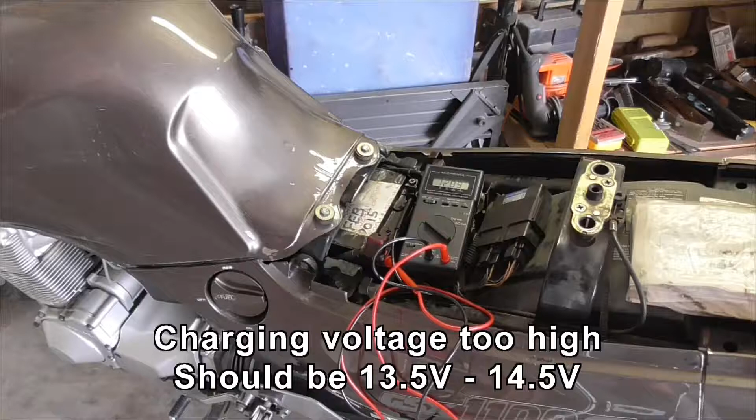So while I was out checking a few things the other day, mostly on this piece to get the connectors nice and tight so it'll actually start, I did notice that the battery voltage when charging was kind of high.

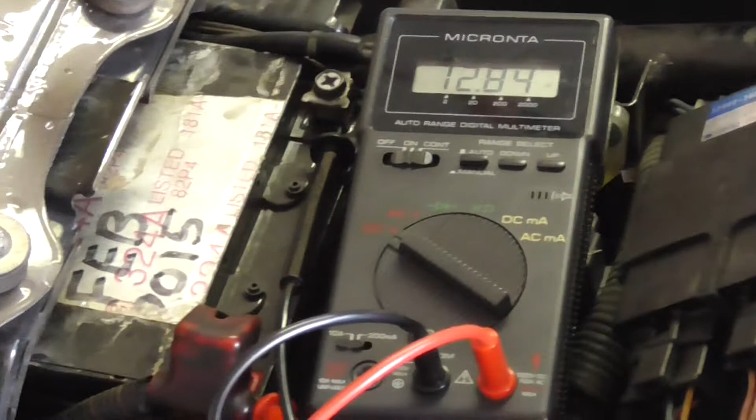Right now, and I'm really surprised, this is 12.84 after it's been resting a day or so. Pretty good voltage, but the charge voltage is kind of high. Let me start it up and we'll see what it does.

You can tell it's about 90 degrees here.

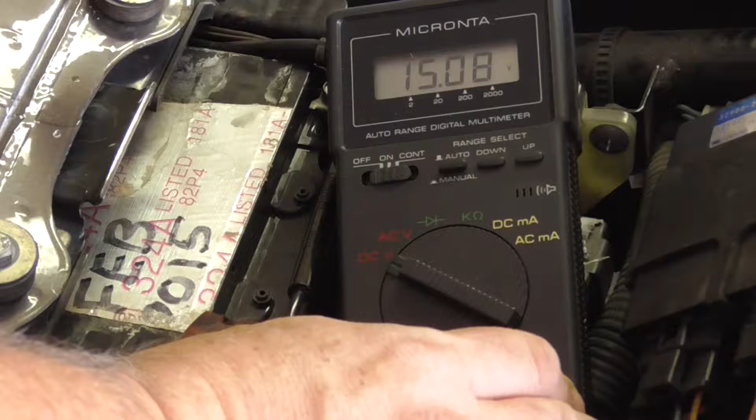As you can see, it gets into the 15 volt range. That's actually higher than what's in the book. So that's a little bit of a problem. We're overcharging the battery, and eventually it's going to hurt it, kill it.

I don't know how long it's been like that. I only checked it because the Triumph Bonneville I have had a regulator that failed low. It wasn't charging it at all. It looked like it was at idle, but as soon as you revved it, the voltage went away. It just wouldn't charge. So this one is actually doing the opposite, it's overcharging.

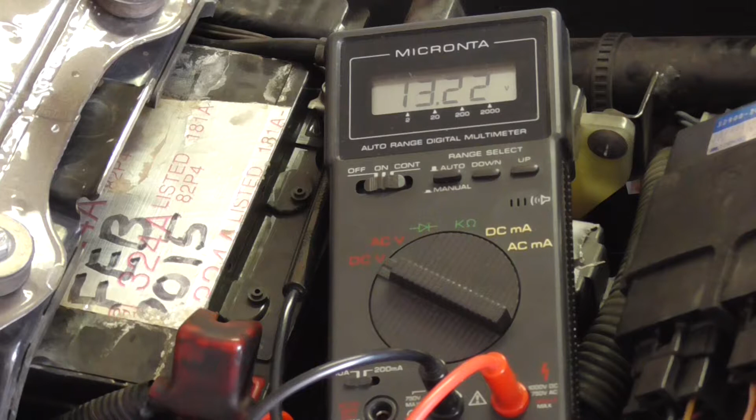So I do have a spare engine. We'll see if I can swap the alternators out on it and see if we can't fix this issue.

Okay, so this is the good book on all things G. This is the alternator. The offending item is this little bit here inside the alternator under that black cover. That's the regulator. Over here it states that the minimum is 13.5 volts at 5,000 RPM. That's why I revved it so much before.

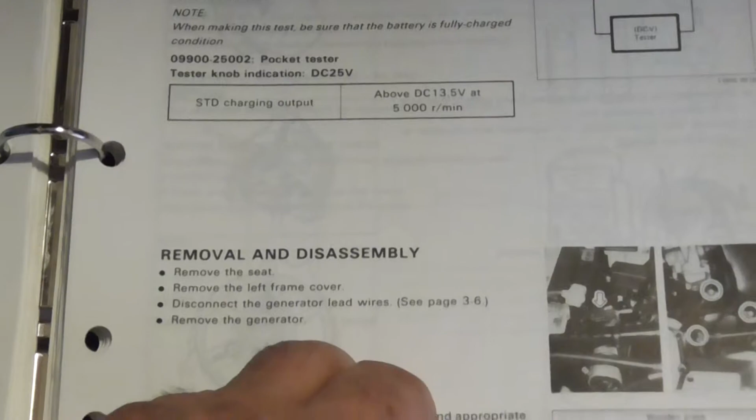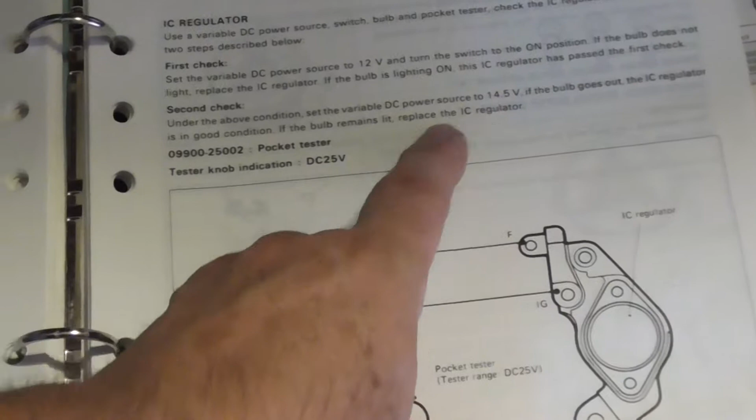Then we switch over to another page, and here where it says second check, blah blah blah, 14.5 volts maximum. Replace it, the IC regulator, which is this piece.

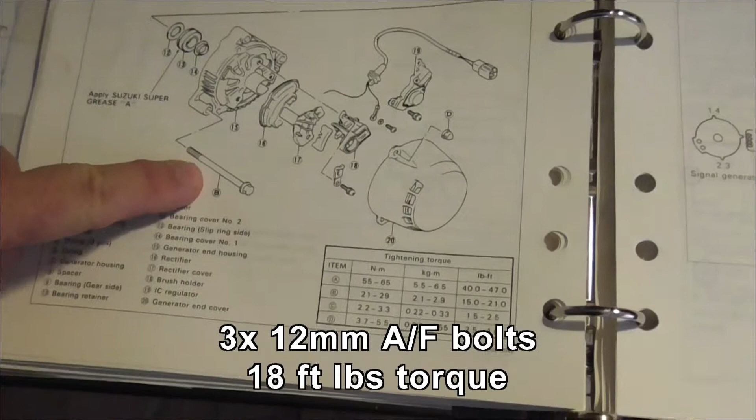So this is their little test setup. And here's the page with the exploded diagram. Yeah, there's the offending item right there. I think there's 3 of these bolts to take off. Replacement torque's 18 foot-pounds.

Looks like I guessed right with the 12mm. The other one's well hidden. That's going to be well hidden on the bike. The other one's up here.

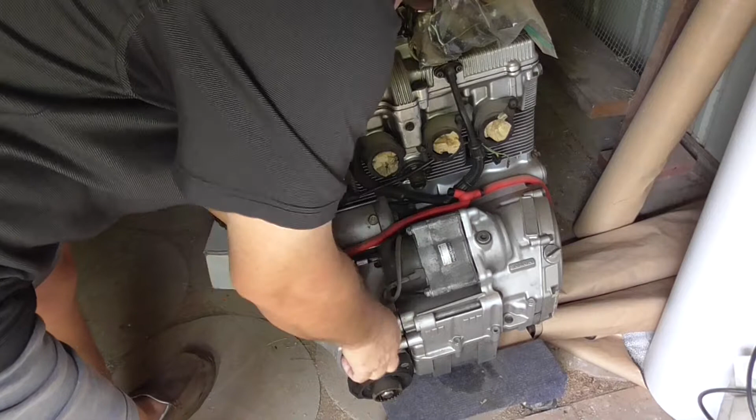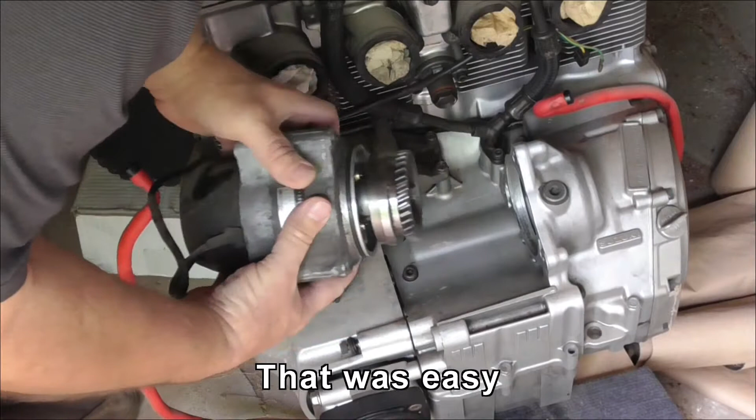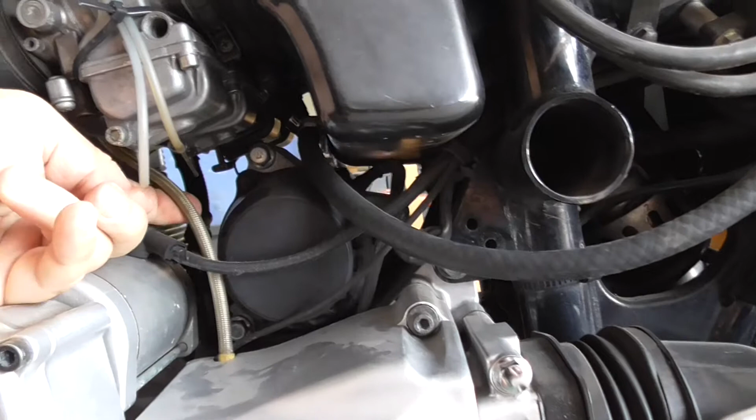Of course, the on-bike access to those 3 bolts I just took out, yeah, a little trickier. Still, I think I can get to them. Looks like this one I'll just push my clutch line out of the way. Have to take the starter off, and then hopefully I can clear all my fuel level crap.

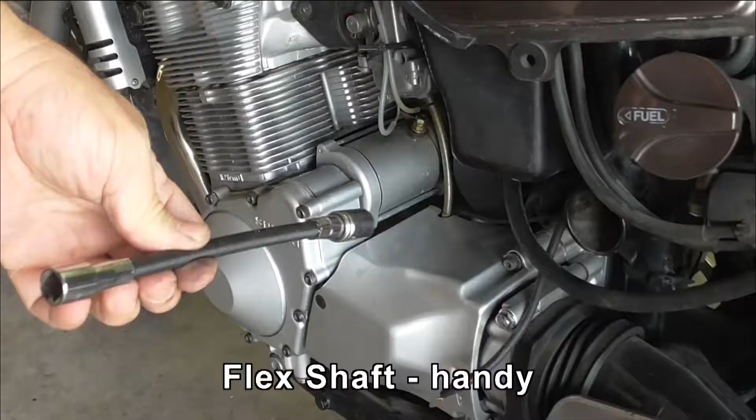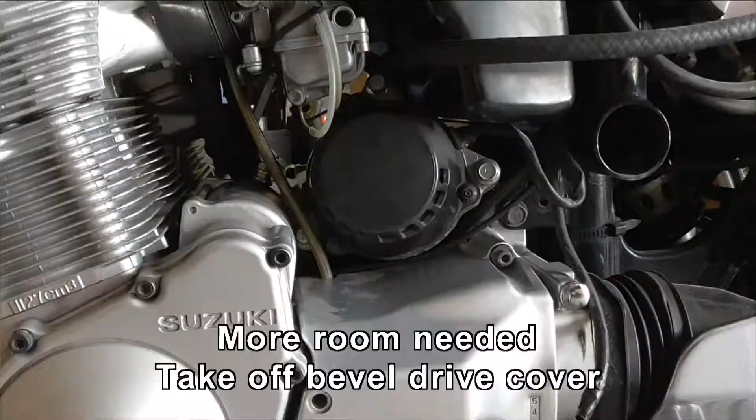Okay, here's a handy little tool I picked up. It bends a little bit, so I can get this 12mm in way down here. And yeah, now I can undo it. Yay! I'm having a bit of difficulty getting it out because of the clutch line.

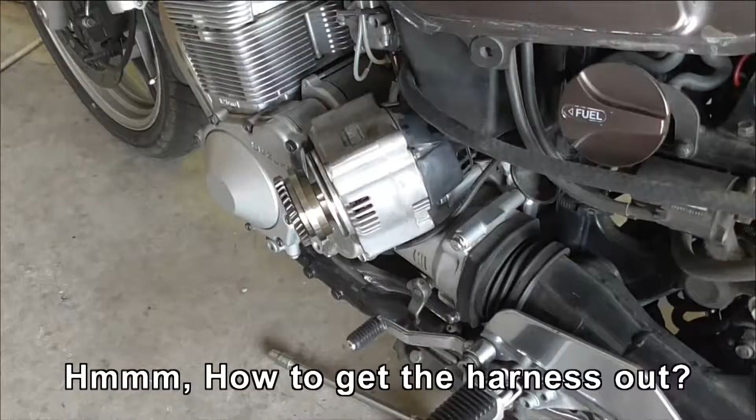It's really not wobbling around much, so I am going to have to take this cover off to give me a bit of room. Alright, I've got it half out, but I've obviously got to get the lead out as well. The lead comes back all the way to here, which is the charging one, and I hope I can unthread it without having to take the tank off.

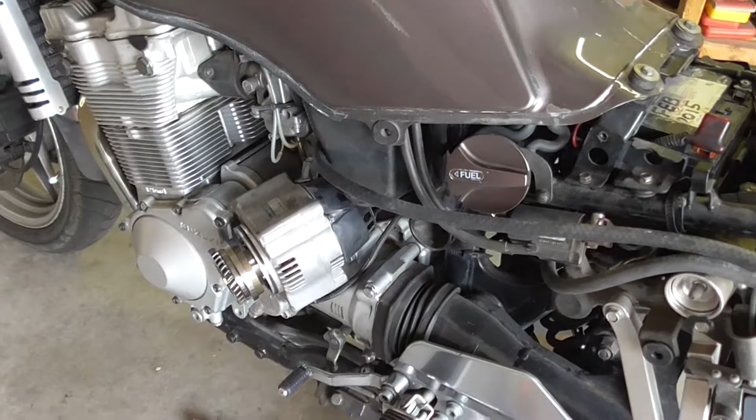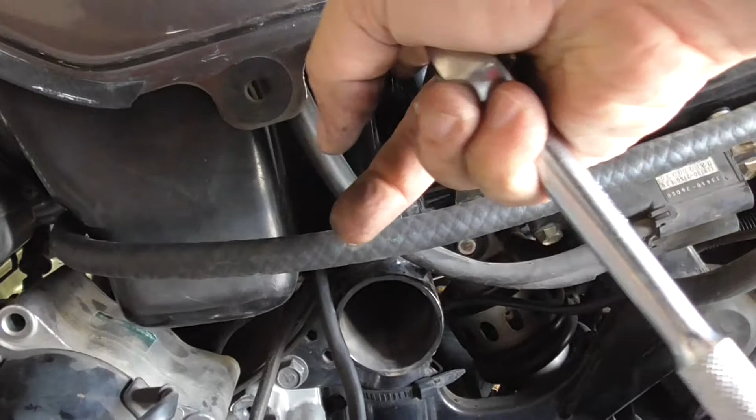Otherwise that'll just be more stuff to take off, put back on. Okay, well I can't get the connector out, it goes around this vertical frame post here, and it's getting jammed between the filter box and that post, so I am going to have to take the tank off. What fun.

Alright, so with the tank off, all becomes clear, right? Yeah, well here's the connector, and it wouldn't go past this point, but if you lift it to here, then you can pull down and out. That was easy, wasn't it? But you got to take the tank off to get there.

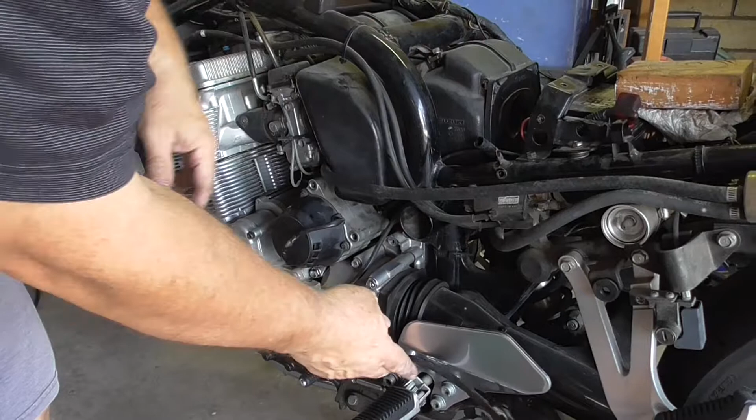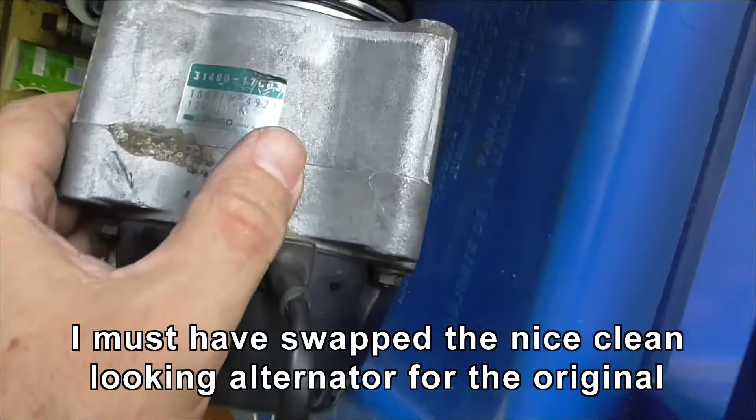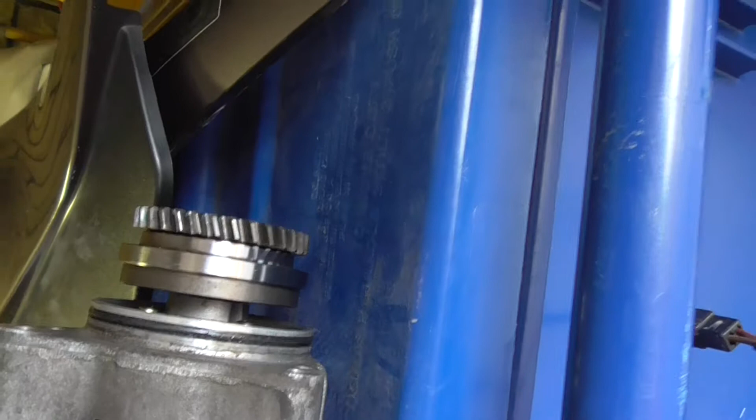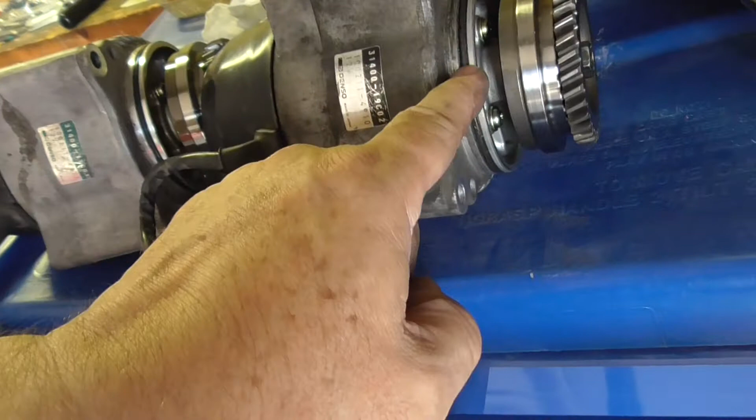I hope it works. I'm going to clean up the ends. I know this is a new O-ring, so I'm going to put this one over here on there, and put this one back on that one for the time being.

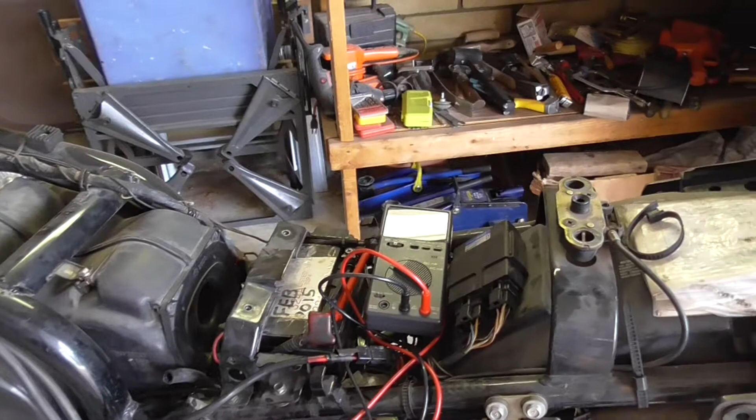Alright, so before I button everything back up, I ran the lead up to its connection point, got the voltage on the battery. I want to run the engine and see what the voltage is going to be. Make sure it's not too high, because it's kind of pointless, you know, putting that in, going through all that trouble if it's not going to work. So let's fire it up and see what it does.

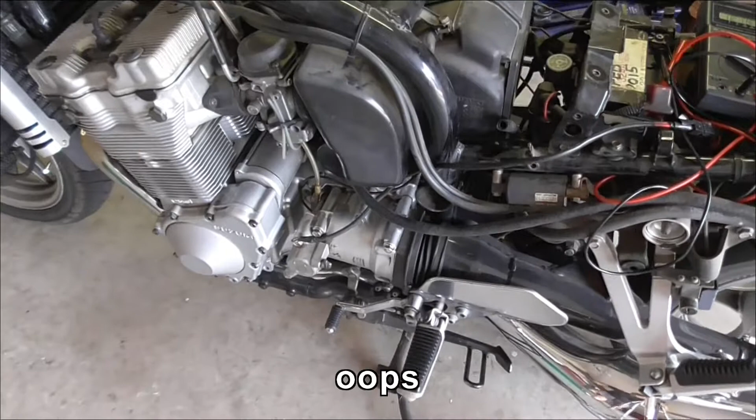Yeah, it would have helped if I'd have reconnected the start motor instead of having it just ground out on the frame. Okay, so we're running again. This is about 1000 RPM.

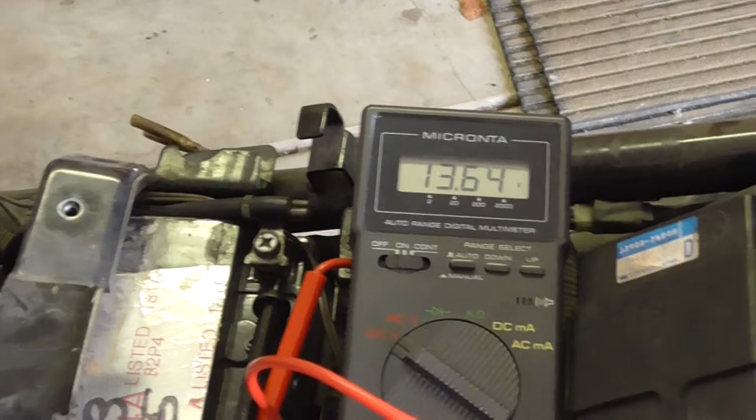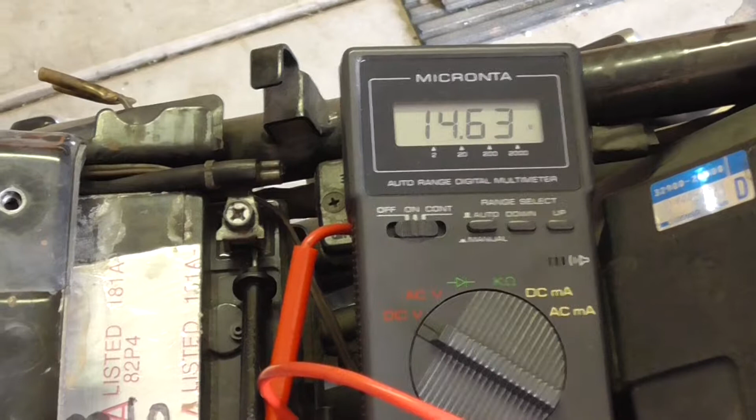Well, it's at the upper limit, the 14.5 volts, so that's better than the other one, so I'm going to keep using this one.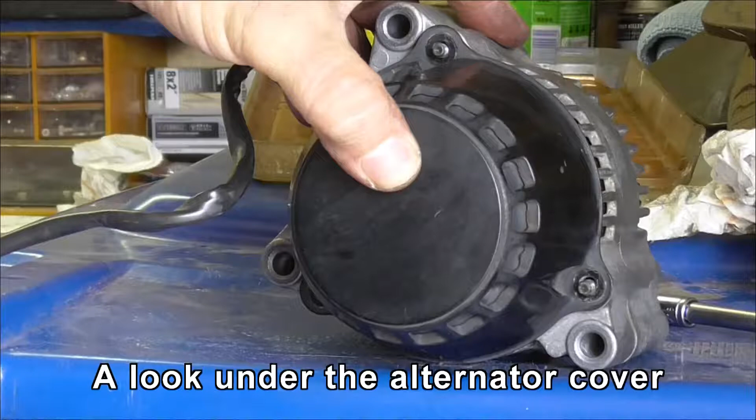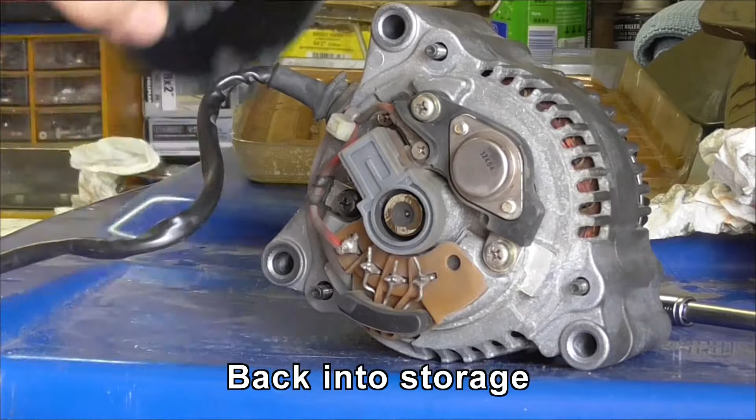Right, just to complete the story here, if you don't have a spare alternator, or if you pick one up from a junkyard or something, a couple of 8mm nuts, very low torque, there it is. There's the component that causes all the problems. That's the bit you've got to replace, which I think is this whole plastic piece here.